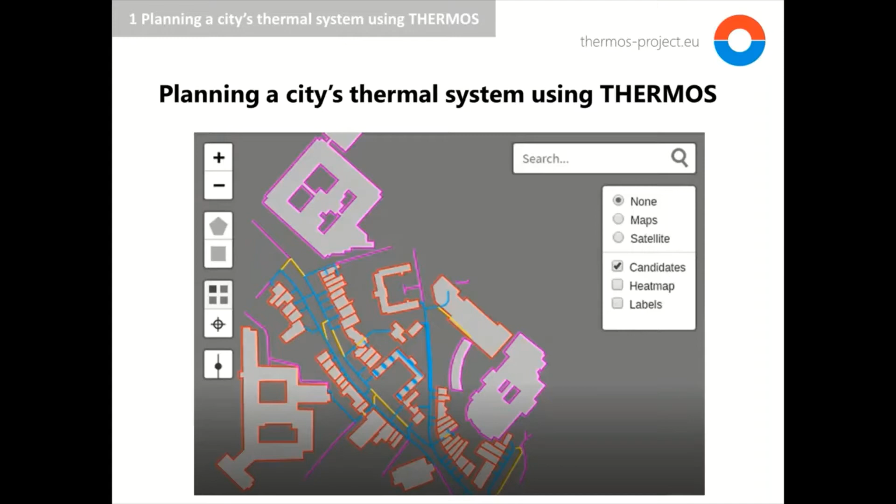Taking a step back, this relates to when we proposed this project, it seems a few years ago now. What was the need for it? What was the driver that we thought was behind the need for a tool like THERMOS?

We were aware that cities need to plan their thermal energy networks in a more consistent way than is currently being done, or was currently being done. At the moment, it seems like there's many different methods used by many different consultants. There's not much consistency across that, and we identified this need to introduce a tool which tries to pull all that together, very accessible specifically to local authorities, but other stakeholders as well.

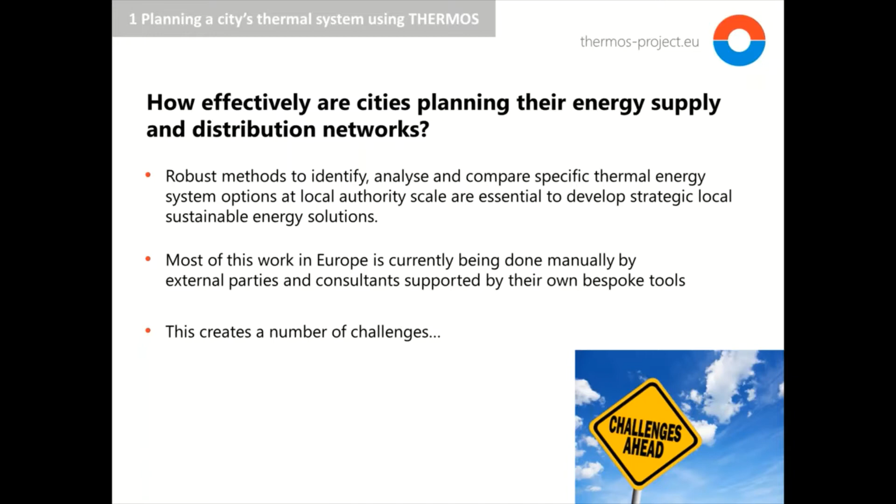So the problems we identified that local authorities were facing is that typically energy master planning and heat mapping studies are very expensive.

There's also, certainly in the UK, limited capacity within the consultancy sector. The UK government has had a rolling scheme of supplying grants to local authorities to undertake these studies, so there were a lot of them going on and only a limited number of experienced consultants to undertake them. There's a bit of a capacity issue there. And of course, a lot of the local authorities themselves don't have the capacity in-house to do them.

They rely on external expertise and skills to guide them and do the initial pre-feasibility study. That varies to some degree across local authorities, depending on how well resourced they are and the size of the local authority, etc.

And as I said, there just seems to be a lack of consistency in the methods used, which makes meta-analysis quite difficult. So when you're comparing all the different studies and outputs, certainly across countries, maybe in a European project looking at the ways things are done, there's different methods used, and this can create problems, making that kind of high-level analysis quite difficult.

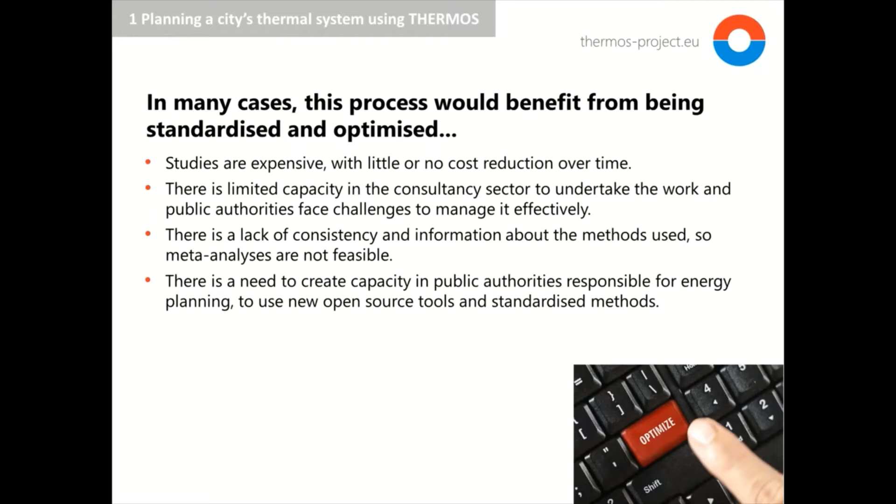So we came up with the idea of using THERMOS, a tool which hopefully addresses a lot of these issues. It's designed as a decision support tool for energy planners. We're using state-of-the-art algorithms and methods, certainly with regard to energy demand, mapping and optimization.

It's all packaged in a very user-friendly, open source, web-based application. We think it's tailored to the requirements of local authorities in their citywide energy planning. Crucially, it offers the opportunity to make studies a lot faster, rather than having to go back and forth to consultants for different iterations. By bringing it in-house, local authorities can do the initial bit, run many scenarios and get up to speed, saving all that interaction with consultants in time and money. So we think that's one of the key benefits of THERMOS.

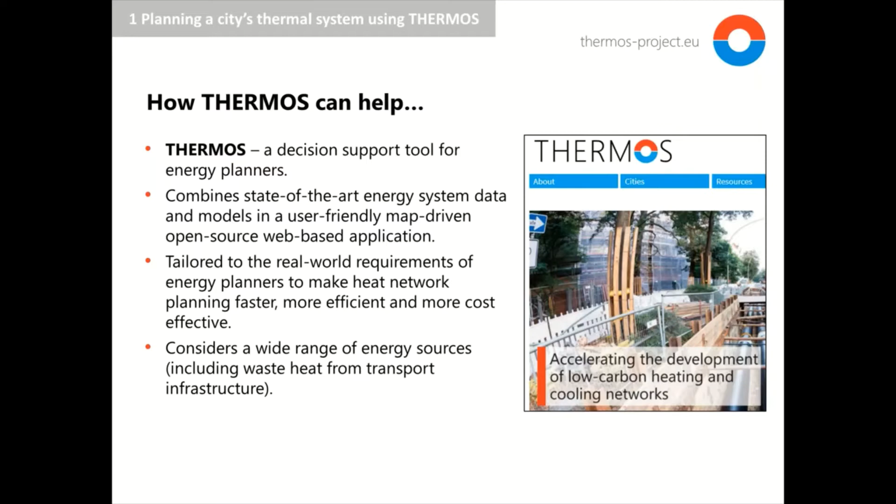As I said, it's got quite a unique heat mapping, energy mapping facility, very easy to use, as you saw in the last webinar if you joined that one. It looks at OpenStreetMap data, which is available in most places, and essentially that's all you need at the very basic level to go ahead and use THERMOS.

We've worked with Imperial College specifically on developing the algorithms to look at optimization of systems, and we've also worked with other partners such as Aalborg University on energy demand data, trying to validate that into our model. Very importantly, as part of THERMOS, we're working with 8 pilot and replication cities—actual local authorities—in what we call an agile development method, working directly alongside them. They are inputting to the development process of the tool, as they will be the end users. We feel this is really useful because we're making it fit for purpose, directed at the end users.

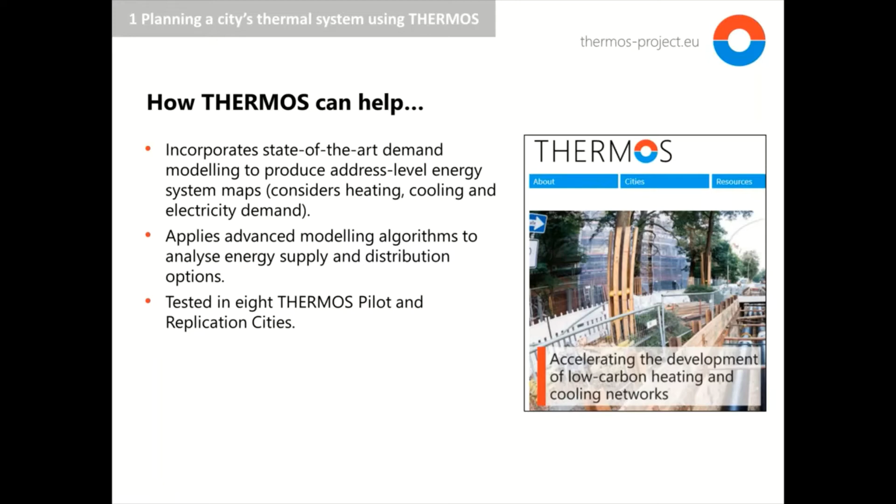So moving on to what do people need to do to prepare to adopt THERMOS. It's all about having a bit of forethought on what kind of supportive environment would be needed to ensure that THERMOS is fully adopted and there's proper engagement. It just takes a bit of preparation for this.

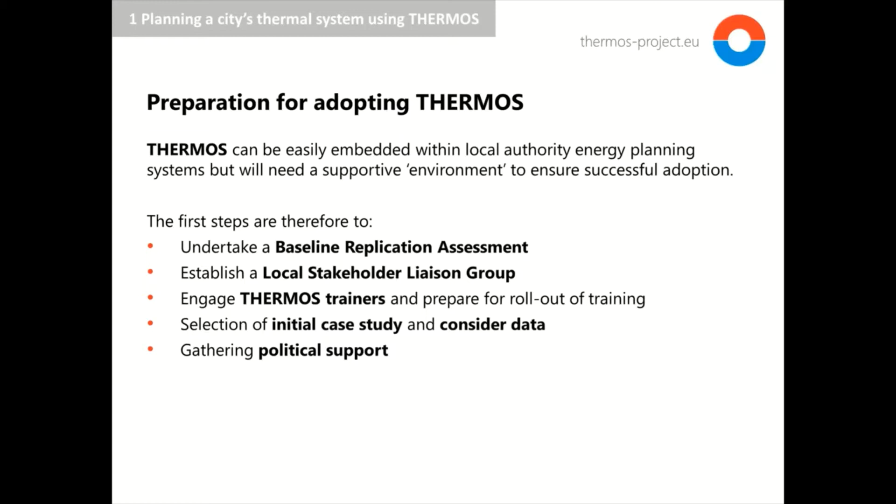This is something we've been trialing with our pilot cities, looking at lessons learned, and doing the same kind of process with our replication cities. We talk about undertaking a baseline replication assessment first, followed by establishment of a local stakeholder liaison group, then a training phase, followed by selection of a case study, and getting buy-in in parallel to that. I'll look at these individually now briefly.

The baseline replication assessment is really just to look at the situation wherever you're using THERMOS, in the city or town where the person who's going to be using it is based, and it's finding out more about the framework conditions within that area, and also to some degree what the national framework is regarding energy use, because that sometimes has an impact.

This kind of thing looks at just heating and cooling across the city. What's going on? Are there any existing networks? What kind of demands have we got? Also, what data is available? What's the target set in local policies? How would district heating feature in that? Does it feature as yet? That kind of thing. Also at this stage, looking at identifying your stakeholders and how you might engage them.

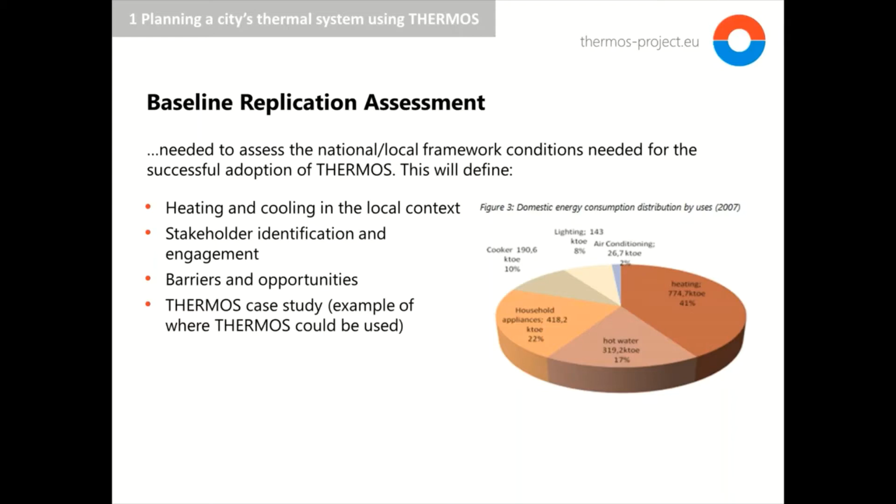Looking at barriers and opportunities specific to the location you're in - there might be unique ones to your city. And just starting to think about a THERMOS case study to focus on a particular area best suited to begin the analysis, an area that maybe has been earmarked before as being potentially suitable for a heat network. So those are the kind of things within a baseline replication assessment, which is really one of the first steps you would undertake.

Then looking to establish a local stakeholder liaison group. Again, this is really key, just to get all the right people on board, whether that's within the local authority or beyond the local authority as well. Just get people engaged, get them in at an early stage, and establish some sort of defined group of stakeholders that are aware of Thermos, and they've got a number of advantages to do that.

It can facilitate data collection across the city. It can promote capacity building, and you can introduce individuals with new skills and expertise as well. And it's a two-way process - not only do you have the opportunity to get data in from that group of people, but also you can communicate via that group of people, sending out the right messages as well.

There's a future module that we'll be doing as well. It's going to be pre-recorded, which is specifically more about stakeholder engagement. So keep a watching brief on that.

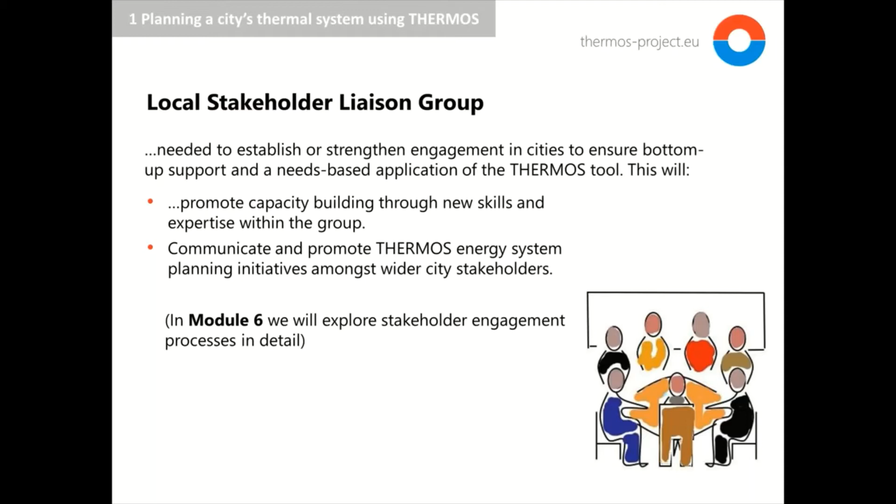Engaging trainers and rollout of training - this is really what we're doing at the moment. We had an initial trainers program about a year ago that was more restricted to partners of the project, but this one now, webinar 2 of this program, is looking at wider participants. There's going to be a network of trainers familiar with Thermos, and we're also recruiting ambassadors - organizations with nominated individuals who can disseminate Thermos.

They can learn about Thermos, they can go on this trainers program, and just raise awareness of Thermos and help other people who want to take it up and who are interested in engaging. So there will be a network of people who know quite a lot about Thermos, and it's important to tap into that for any local authority or other stakeholder who wishes to adopt Thermos going forward.

There's a lot of materials we're producing which will help that - things like publicity materials such as the Thermos Flyer, a set of capacity modules we produced last year, available on the website, and also an innovation catalog and a series of training videos. There's quite a suite of materials now, some still being completed, but they will be available for people to use in spreading the Thermos word, so to speak.

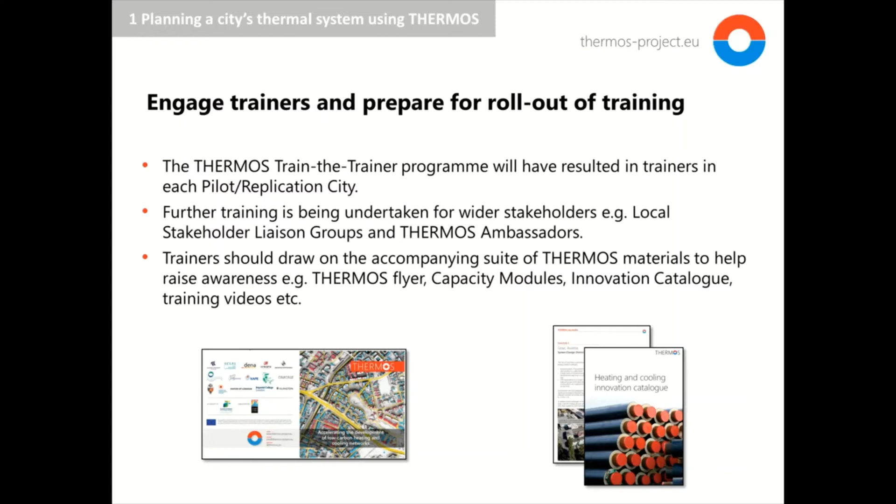So the next part was just selecting an initial case study.

This ties in a bit to one of the exercises we'll ask you to undertake as an option at the end of this webinar. I won't say too much about that now, but there's generally 4 use cases that Thermos has been designed around to address. Things like whether you're looking at an existing network and want to expand it, or whether you've got an existing energy source and are looking at a demand to meet by that source. We'll talk more about that in a minute.

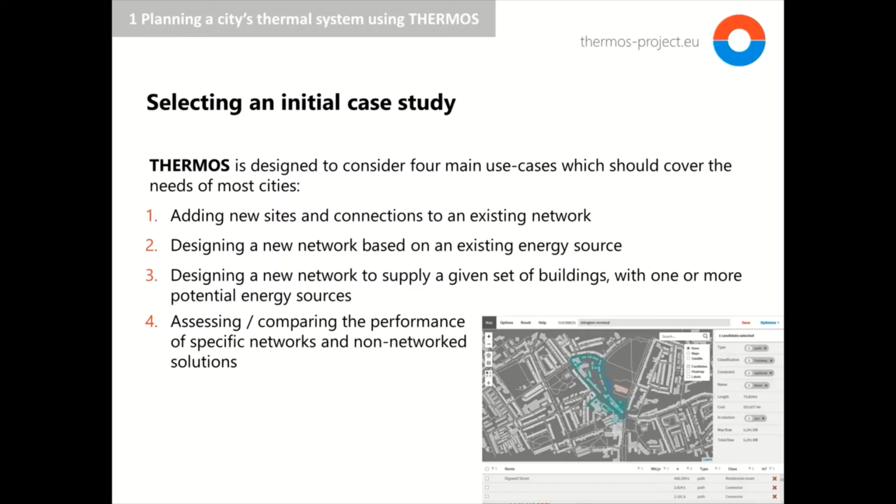So where does Thermos fit? This sequence here is typically the process people go through when looking at a heat mapping or energy master planning study, going from heat mapping up through to commercialization. We think Thermos can certainly help with those first 3. It can bring this in-house without recourse to consultants, depending on the resources you've got to learn about the program and use it. Heat mapping, energy master planning, and high-level feasibility - all this can be done within THERMOS.

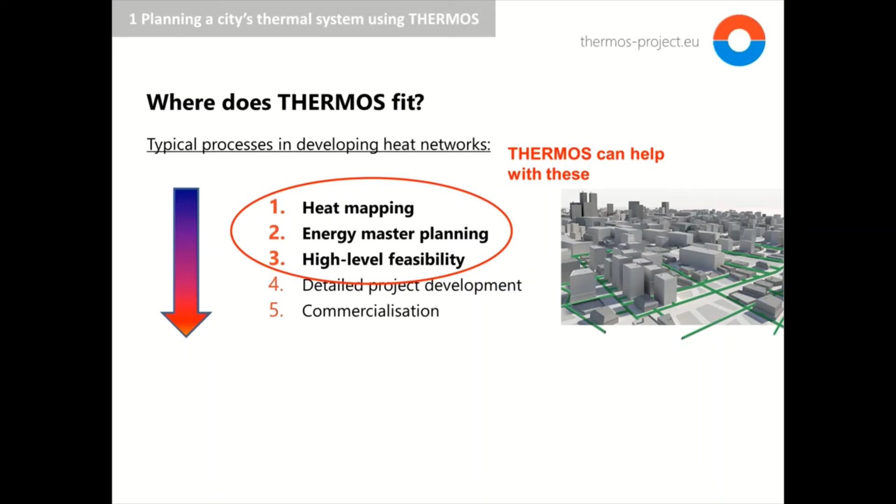A little bit here about data - what does THERMOS need? At the very basic level, I mentioned OpenStreetMap before. That's all you need to start with really. OpenStreetMap covers most cities, certainly across Europe. It's a little sporadic in places and doesn't always include every building, but all that information is within THERMOS. As you saw 2 weeks ago, you can select an area and THERMOS does the rest. It will import all that information from OpenStreetMap and interpret it into polygons - buildings, roads, connections etc. - ready for you to start analyzing. That's one of the first key THERMOS processes, creating that local map. On a very basic level, once you've logged on, you can produce a map using that information.

Alongside that, we strongly recommend that LiDAR data is also introduced. This describes building heights, and its availability is variable. I think most big cities do have this data set. It's something we at CSE would put in on request - not something the user can currently do within THERMOS. But the thing with LiDAR is it allows the program to calculate much better energy demand estimates, giving an indication of the volume and form of buildings rather than a two-dimensional estimate. This introduces a three-dimensional estimate, so you get a more refined energy demand estimate.

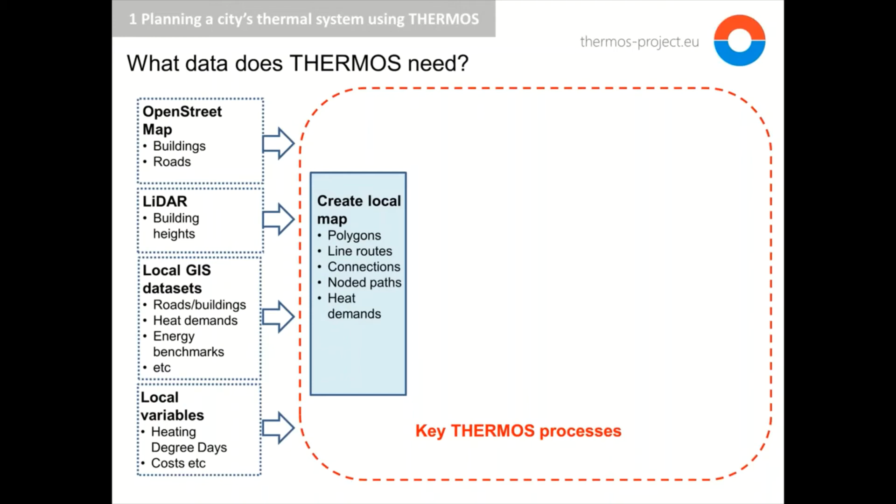Also, it's good to have a little knowledge about local variables such as heating degree days and any local costs you might have. Again, the program assumes a set of defaults for these, but if you wanted to change those, it's very easy to do - it's all very transparent in that way. Once you've created your map using some or all of that data, you can start configuring your network options and optimize the network under certain scenarios. So that's a quick overview of what you actually need practically to start using THERMOS, apart from a computer connected to the internet, of course.

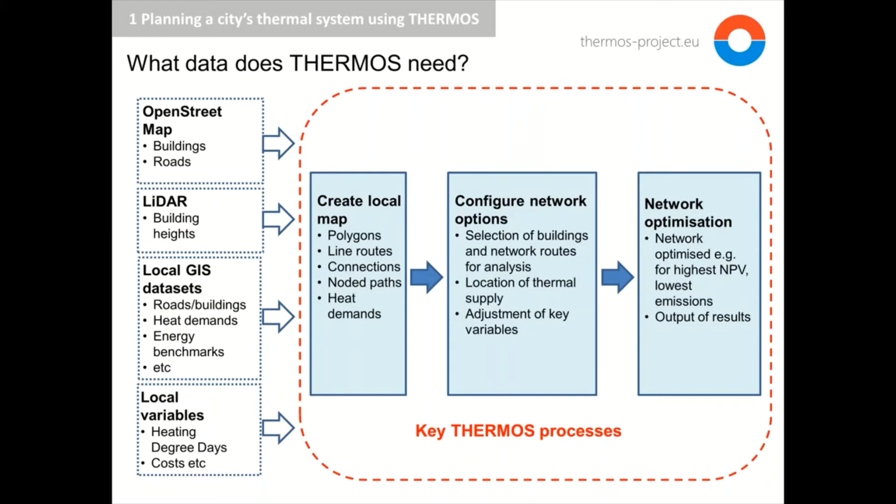And gathering political commitment - obviously a key point is getting buy-in from the key people who need to decide on adopting THERMOS, make it work, truly embed it within the organization, and enable it to influence policy as well. We think that's key - local targets, local plans and policies, and some examples there of the SEAPs and SECAPs that a lot of cities are signed up to. So it has real potential as a tool to help influence this by suggesting the best options for heat networks, which, as we know, have a lot of potential in reducing emissions for cities.

In terms of getting organisational commitment, it's important to have an idea of the resources you need to use THERMOS. Our recommendation is that you get senior level buy-in and there's a formal adoption of it, so it truly gets embedded within the processes of the organisation.

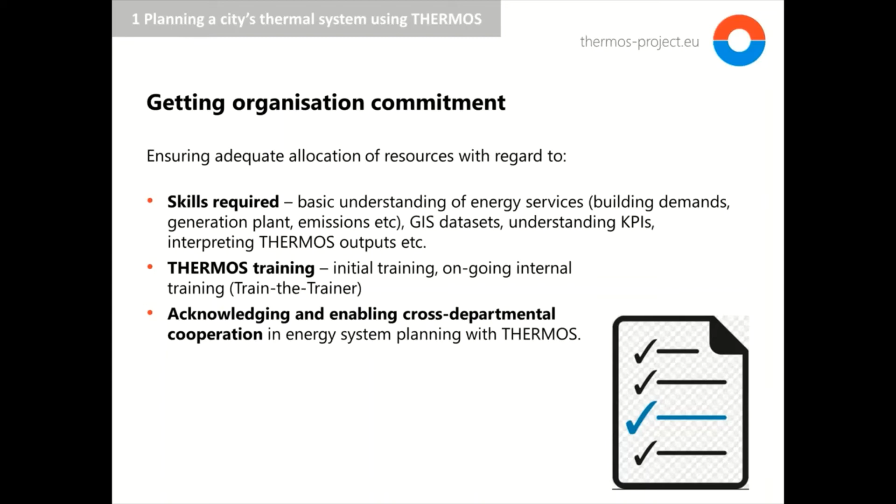So we all know what THERMOS is trying to do, the influence it has, and the benefits - we don't need to convince anybody here about the need for climate change mitigation. But on the grander scale of things externally, this is what we hope THERMOS will achieve, certainly with regard to lowering emissions through use of more efficient heat networks rather than individual boiler-based systems.

It goes into security of energy supply, where you've got decentralized generation and distribution of energy. There's a range of socio-economic benefits as well - it overlaps with, certainly in the UK, the concept of fuel poverty, where you have the potential to offer lower cost energy, and again, security of supply.

It's just looking at the synergy between local energy sources and demands, and making maximum use of those.

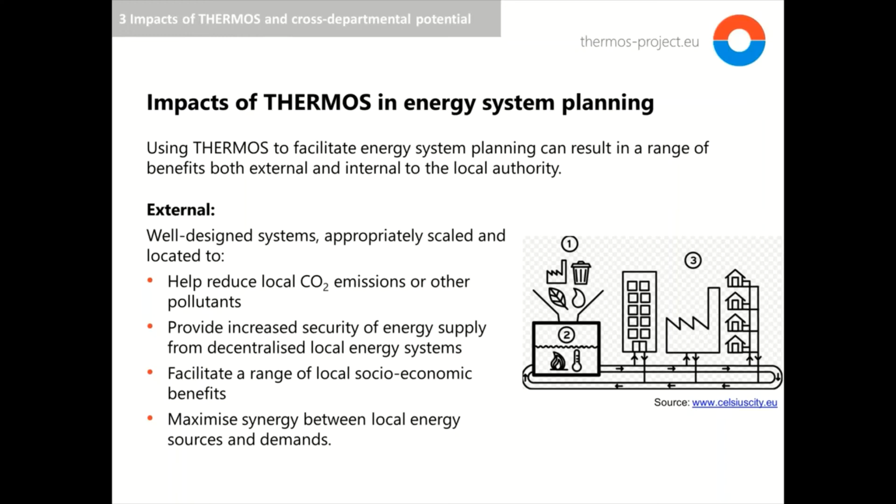Internally, to an organisation - and we keep coming back to a local authority, where this would mostly be used - we think it's a cheaper way to do the initial part of feasibility studies. It can build capacity within that organisation, and it's a much more efficient, faster process.

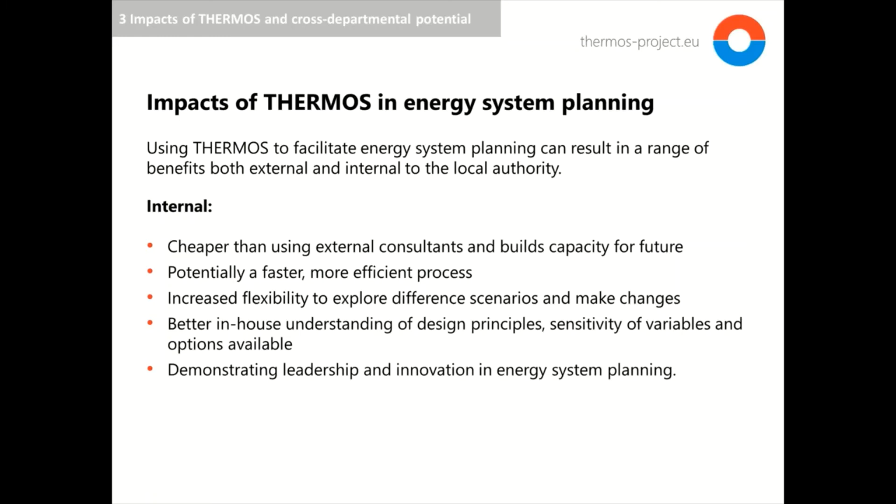You can use it iteratively to run many different scenarios very quickly, and alter and tweak things to your liking. You're building this capacity of knowledge about heat networks within the organization as well, and demonstrating innovation as a local authority, as an organization in energy system planning. So there's a lot of benefits there for an organization wanting to take on THERMOS.

Going back again to cross-departmental potential - thinking about who across a local authority might be involved. This is very dependent on the type of local authority, and they do vary a lot, even within the UK - big ones, small ones, with different types of teams and different resources within those teams. But the main thing here is to avoid that isolated, or silo, approach, where departments work independently of each other. You've got to make sure all the people that need to be involved are involved, and that communication lines are open from the start.

Just a few examples of which departments might be involved: there's obviously the spatial planning department, looking at the high level strategic infrastructure needed, and there's housing and building management, who could be on the front line, actually out there talking to home occupants, getting views on heat networks - that liaison with the end users.

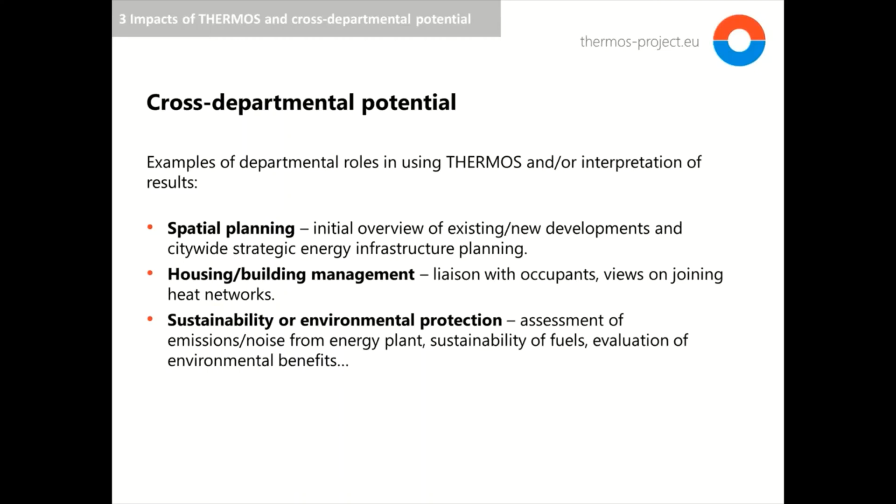There's teams that are involved in sustainability and environmental protection, so they're interested in the sustainability aspects of THERMOS and what it can trigger, what it can achieve. There's a whole range of things there. Engineering, of course, when you're getting down to the detail of proposed pipe routes and costs as well, and the actual works that are needed, engineering works.

There's energy management, which can be a department on its own in some cases as well. They can help with knowing more about the energy facilities of a city, where potential waste heat might be if you wanted to tap into existing energy sources. And also feeding back on demands, that local knowledge about what the energy demands would be, not just annual demands, but looking at a profile of the demand over a year, what kind of time-based demand you'd be looking at, what kind of curve you might be considering.

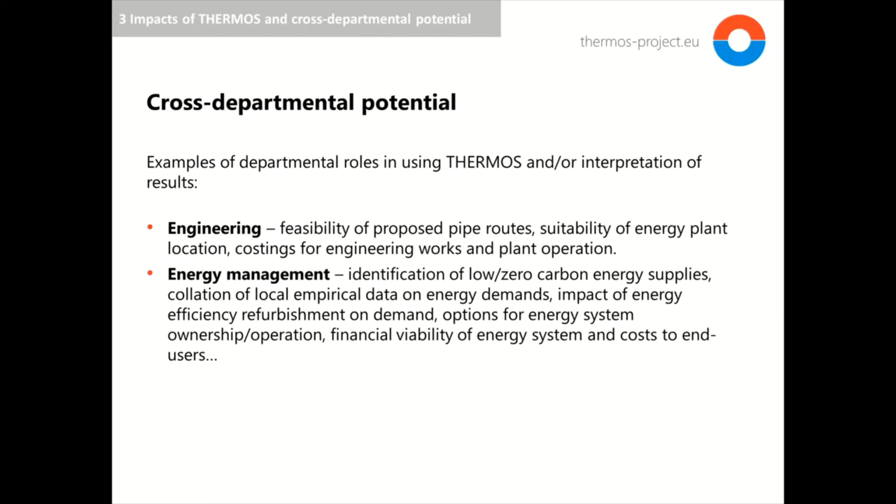Waste and water management. They could be involved certainly as a potential heat source through anaerobic digestion plants or treatment of waste. There's energy potential there, energy from waste plant systems.

Economic development, that kind of relates back to the wider socio-economic benefits I was mentioning, that would be realized through locating a heat network in a certain area. And of course, energy procurement, where you're comparing costs, existing energy costs, with those modeled by THERMOS.

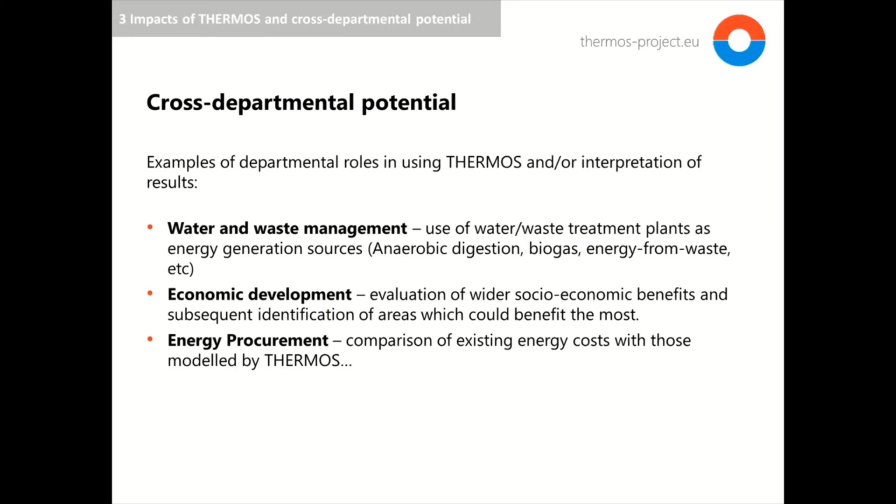And finally, yeah, social services. Again, they're on the front line, liaising with maybe social housing occupants. So they could be talking to people about a potential network in their area at that time.

Transport mobility teams, they can be involved in the infrastructure and routing pipes, looking at roads and what structures are there, what utility infrastructure services are there that need to be aware of if you're considering running a pipe down a certain street, for example.

And IT services, as I mentioned, in terms of GIS formats specifically, and optimizing THERMOS in the sense of giving it the best possible local information to override the defaults. You get increased useful outputs in that sense, is where you can maximize the use of your local data.

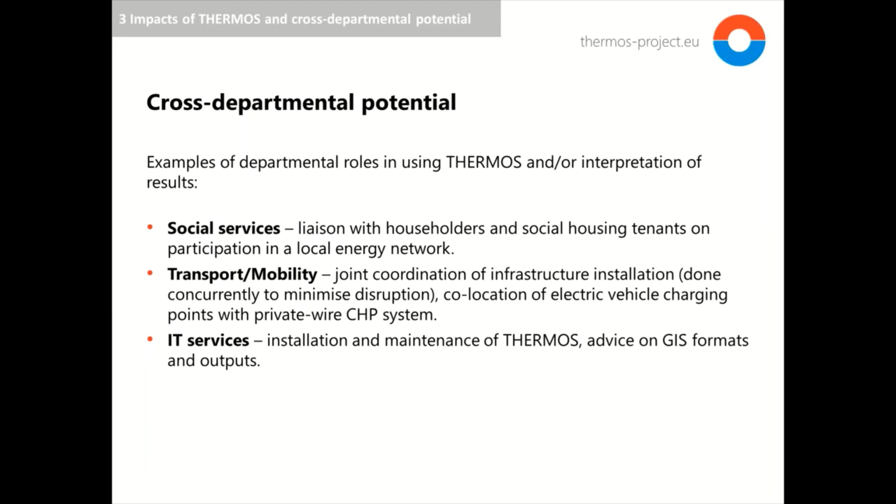So yeah, THERMOS is open source. It's an open source tool. It facilitates multi-stakeholder use by a number of ways, just kind of going over a little bit to what I've said before. It's using common data sets wherever possible and making that flexible for the user to use their own data sets.

It brings in a certain level of consistency across studies, so that other people can then start comparing outputs and different projects. That's very useful for higher scale studies, and a lot of support through different project outputs that we've put together so far.

It is not just for local authorities. There's a list of people who can potentially use it, ranging from central government, civil service, consultants could use it, could be utilities, community groups as well to some degree, who certainly in the UK, who can now be involved in the planning system through something called neighbourhood planning groups. It's something they could use to look at the potential in their own area. Others, public sector bodies, where you've got suitable heat demands, and also housing associations. So there's a range of stakeholders that can end up using THERMOS and would find it useful.

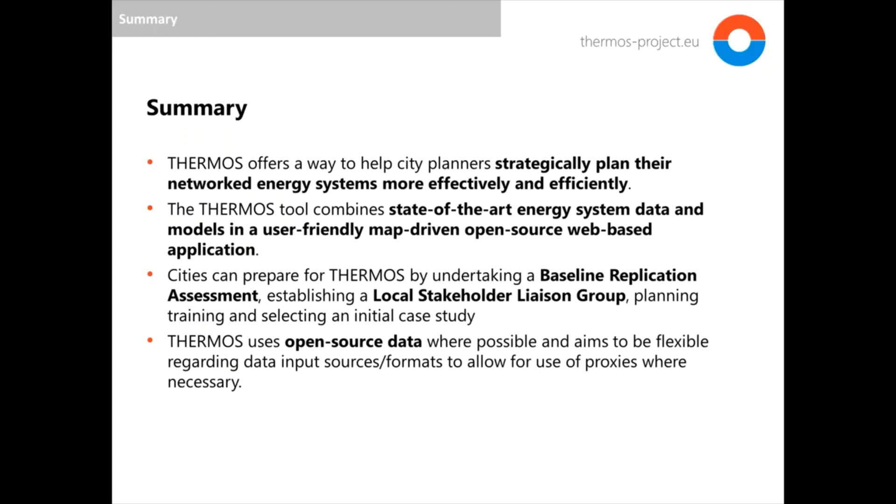It uses open source data as far as possible and allows local data to be used as far as possible as well, and makes that as easy as we can to have that facility to introduce that local data aspect. We've looked at the importance of getting that formal corporate buy-in and looking at the resources that are needed in order to adopt THERMOS. We looked at the benefits of THERMOS, both kind of higher level external benefits and more local internal benefits to an organization.

We've also looked at the issues around cross-departmental collaboration to make sure that everyone who's involved or who should be involved is involved, and that there's a process there for keeping everyone up to speed and working as a big team.

And the last thing was to emphasize that it's very flexible. It's a tool that is there, a web-based tool that anybody can access. So although it was designed specifically for local authorities, it's a tool that many other organizations can use as well.